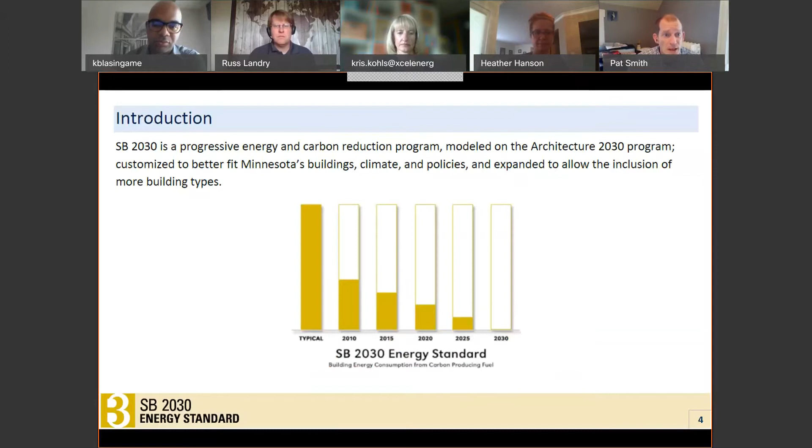And this program fits within a network of related programs that we have in the B3 guidelines program. On the next slide, you can see where this fits. We've got B3 guidelines coming alongside SB 2030 and going through the design and construction phases, and then a suite of programs that are coming in also in the operations phase that include benchmarking, which picks up energy and water consumption data for projects that are up and running, and a couple of other elements of our program.

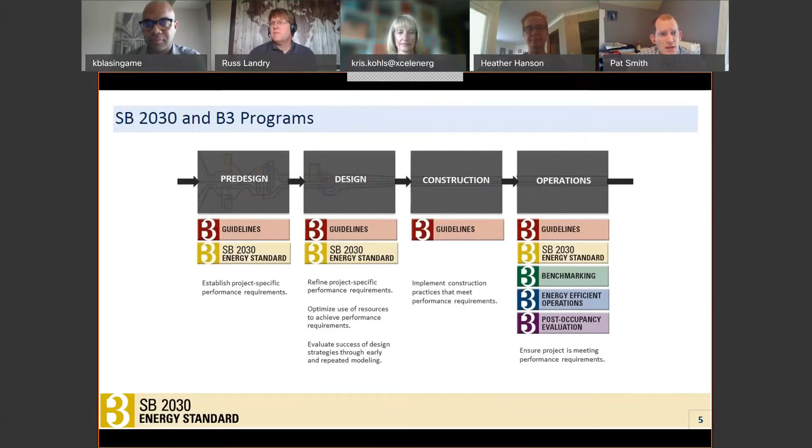So to get this baseline right, we need some information about what the building's program is in order to capture the characteristics of that building. What characteristics of that building impact the energy use? Because we can't set the same target for a warehouse that we would set for a research laboratory. We want to be very detailed about how we're doing this target setting exercise. So this is things like ventilation need, process loads in a project. If your project has a more intensive schedule, that all comes into play when setting your energy target for a building.

So this develops a very customized benchmark for projects, so you will know you'll be treating them according to what their program needs are. And we need this kind of fidelity because there's some variation even within building types between what the different loads are going to be. We pick up this definition, this building characterization, in terms of what are called space asset areas, and those are large programmatic building blocks of the project.

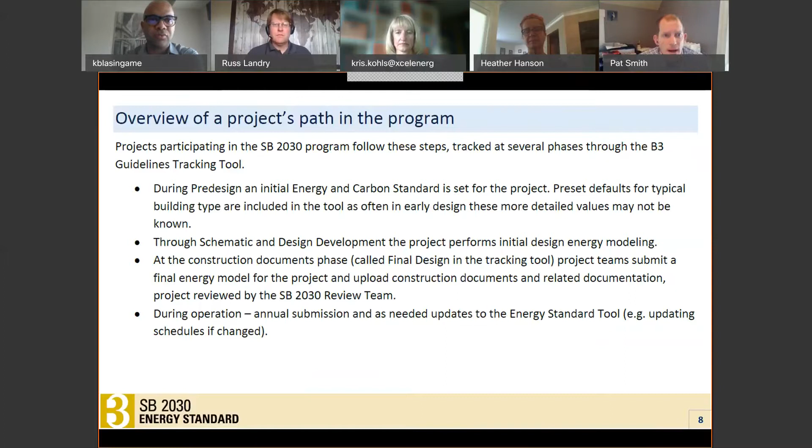Looking at the renewable energy options that are available for projects. So 80% better is a significant reduction from that 2003 baseline. It does represent a step above current code, and in some instances represents a step above what can be achieved with what we consider to be cost-effective measures. So projects that can show that they are exhausting the cost-effective measures available to them can look at other options for hitting their SB 2030 target.

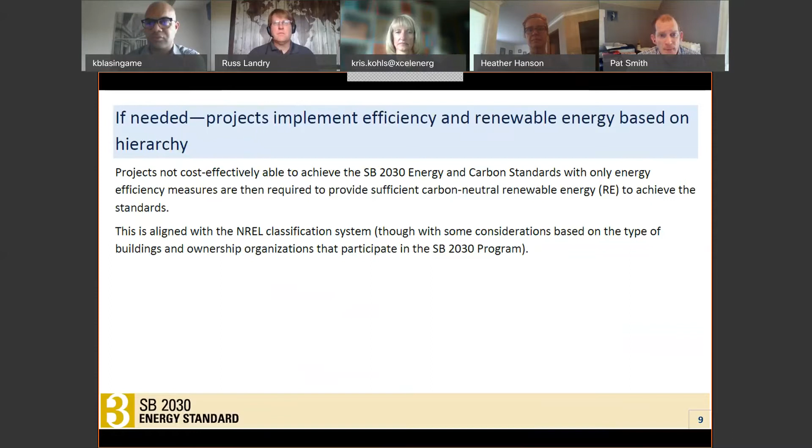But I'll mention that projects need to look at cost-effective measures both on the efficiency side and on the renewable energy side before looking at offsite options. They'll do this evaluation based on a hierarchy of renewable energy generation, and so this can be done in the broader portfolio, which comes into play for state agencies that may have other areas in their portfolio that present a cost-effective development option.

So we're looking at the first three options under this hierarchy as being equivalent. So we've got efficiency measures, renewable energy sources that are being developed on site, and renewable energy sources that are being developed as part of a larger campus, which we're expecting to see most often occurring on university campuses that fall under our program. So those three options of the hierarchy need to be exhausted before moving to other options, and we do that based on a cost effectiveness test.

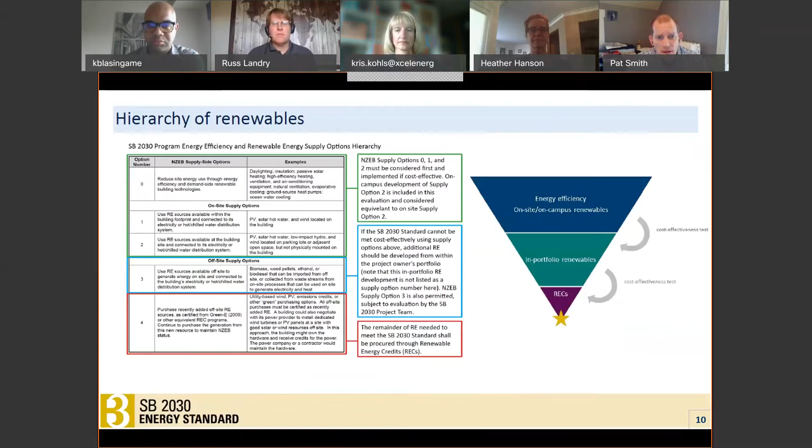And so one other note for program updates as part of this move to 2020, this was one element that we put some development work towards, was developing this hierarchy of renewable approach and different options to make available for project teams to be able to hit these targets. We also looked at what our definition of cost effectiveness was. So our work from the state is required to consider cost effectiveness, and for that consideration to be evaluated in the same way that the utilities consider cost effectiveness when developing their incentive programs.

The type of evaluation that's done for utility program development is more detailed than you'd expect a one-off project team to pursue. And so we needed to develop a way to proxy that cost effectiveness in a way that was understandable for design teams. And what we landed on was looking at a group of around 115 buildings and looking at what measures based on a simple payback could be considered to be cost effective and could be considered to pass, particularly the societal test when looking at effective use of resources. And so that initial study by CEE landed on a payback period of 15 years or less could be considered to be cost effective under this logic. That was done in 2009. And so that was the test that we had in operation for the first roughly 10 years of the program.

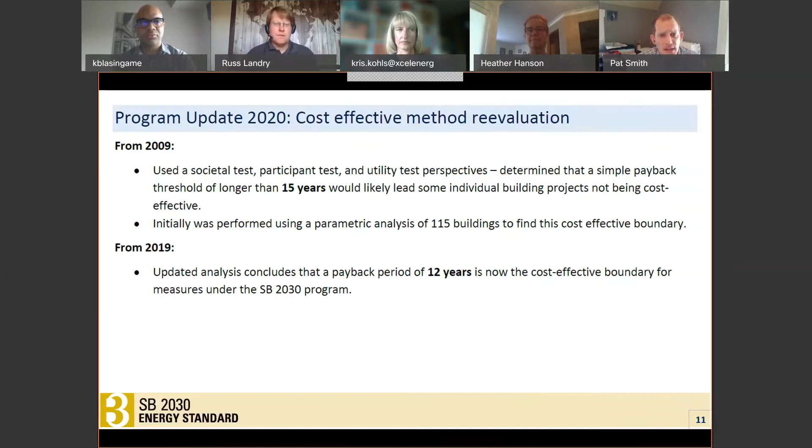Additional program update is to hold renovations to the same standard as new construction. When we moved, we looked a lot at how far the code had gotten. It had surpassed where we were with SB 2030, so we were seeing some opportunities unmet. And looking through the database of projects that had previously gone through the program, we were seeing many of them were making it much of the way, sometimes all of the way, to the 2030 standard.

And so with this additional ability to pick up offsite options, we moved the program to be able to pick that level of performance up for renovation projects as well. But I'll note here specifically, if a renovation project is looking to use that hierarchy of supply options to meet its standard, we are sensitive to considerations around durability and other issues that come up, particularly around historic masonry projects, where there's a limit to the amount of increased assembly performance that you can achieve because of these durability issues.

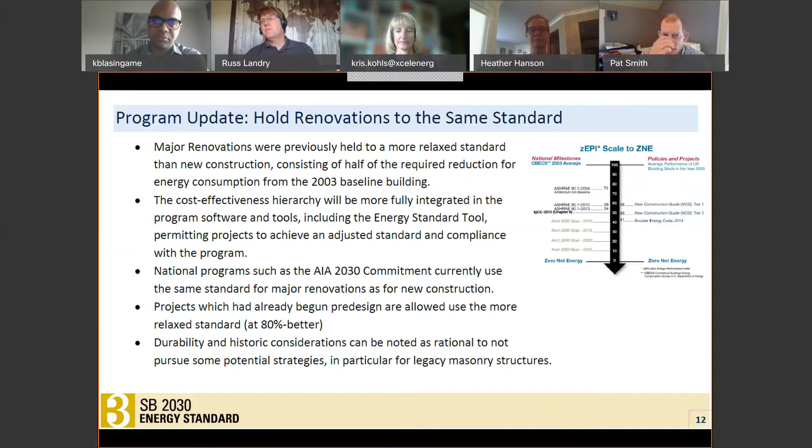And as a final note, I'll talk about a few alternative paths we have in the program. We have a small buildings path where we're still using the same overall structure, where projects look to on-site opportunities before moving off-site, but then allowing this to be done with a prescriptive approach rather than going through a process of iterative energy modeling. We also have an approach for partial mechanical upgrades if only a limited amount of mechanicals are being modified.

We have a wastewater treatment process, which looks a bit different because there are different opportunities in that sector and a different level of energy modeling that's typically performed. And then there's something that was sunsetted in 2020, and that's the cost-effective adjusted standard. So this was a process that has been now developed into setting this on-site target before stepping forward to off-site options. And so projects that started schematic design prior to 2020, a few of them are still working through this process. But from 2020 on, that's moved into setting this on-site target.

Great. Thanks so much, Pat, for that detailed review. Moving on to Russ, how do you approach your review of projects with the recent SB 2030 changes? Are there design aspects that you're focusing more on now?

Thanks. While the review process for the final design hasn't changed much, I'd like to say that it's more important than ever for project teams to make sure that they early on set an accurate SB 2030 energy standard, and also early on get a good indication of their early design energy performance to make sure that they have realistic expectations in terms of where they stand in comparison to the standard.

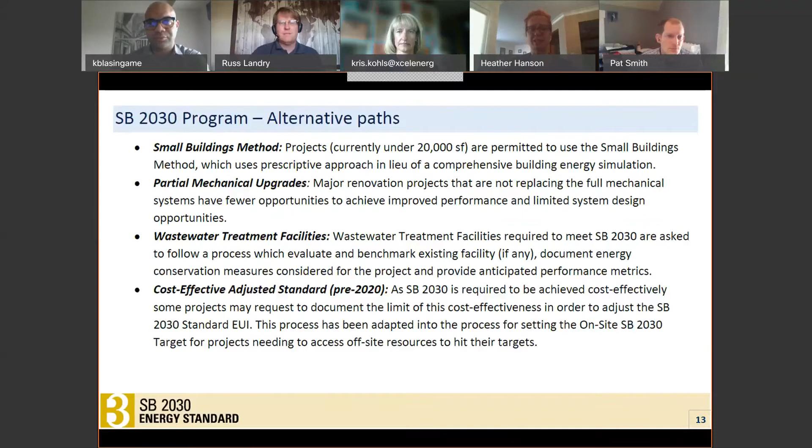that end-to-end to help spot any potential issues in terms of consistency between how the standard is set and how the modeling is being done, and to try to help avoid any surprises later on, and kind of catch things early on and avoid issues as you go through the process later. Great, thanks, Russ. Really good advice and good guidance to the teams.

Keon, as a project manager and architect for Marshall Avenue Flats, could you tell us about the project and how it became involved in the SB 2030 program? Absolutely. Thanks, Heather. The Marshall Avenue Flats is a 6-story, 97-unit multifamily affordable housing project located at the intersection of Marshall Avenue and Fry Street in St. Paul's Union Park neighborhood. This is a rapidly developing area of the city that's not so affordable, but has access to a lot of different amenities. So we saw it fit to look at affordable housing at this location to increase the housing stock within this community.

Affordable housing projects seek funding from various sources like LIHTC funding, low-income housing tax credits, from the city of St. Paul. St. Paul requires compliance with the city's St. Paul Sustainable Building Policy, which adopts the Minnesota Sustainable Building SB 2030 energy standards. So we received more than the $200,000 of funding that we were just talking about with Pat. So we were required to go through the process on this project.

Great, thanks, Keon. And Pat, is the Marshall Avenue Flats project typical? What other common project types or motivations lead to enrollment in the program? So SB 2030 is required for projects funded, such as this one, by the city of St. Paul. So we're seeing some similar projects working through the program. Some come in from scattered around St. Paul. We're seeing some come in from the Ford Site development.

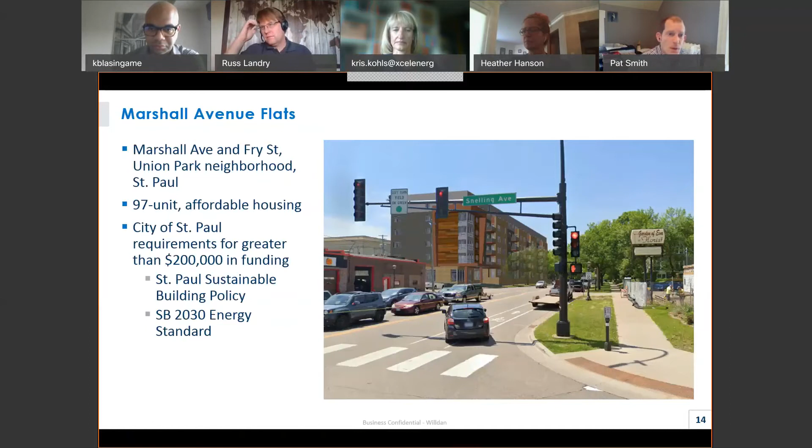So one of our challenges, I'd say, one of our goals in the program has been to adopt and land this concept across a lot of different building types and across a lot of different opportunities, which do vary between our work with the state and our work, in this case, with the private developers. Great, thanks, Pat. And Kris, as the manager of Xcel Energy's Design Assistance Program, can you talk about how energy efficiency programs can assist projects in meeting the SB 2030 energy standards?

Sure, thanks, Heather. Utility energy efficiency programs are great resources for projects that are enrolled in the SB 2030 program, often providing services or incentives for installing energy efficient equipment. With EDA, we provide free energy modeling and consulting to identify and prioritize the cost-effective energy efficiency options. And rebates are available to offset the upfront cost of more efficient systems, driving down your initial investment and also allowing you to go beyond your initial plans.

Energy models provide opportunities to reach new heights for energy efficiency and renewable penetration. They compare how combinations of building systems and components perform and allow you to decide on the best combination based on things such as project cost effectiveness, savings, initial expenditure, the incentives, a payback, or the energy use per square foot. And it really enables you to maximize your energy efficiency strategies at the lowest cost.

Thanks, Kris. Thanks, everyone. So let's talk next about how a project team can best prepare. Pat, what are some of the key tips you would like to pass on to design teams for beginning the SB 2030 process and preparing to navigate the program?

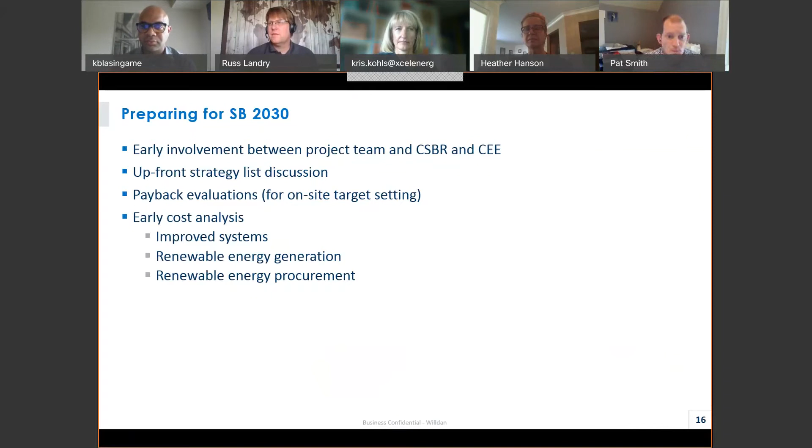Okay, thanks, Pat. And Russ, can you add insight from the perspective of a reviewer? What do you think would be most helpful for a project team to know up front?

Russ, you may be muted.

And some of the key areas there that we're looking for consistency is the programming, even things like square footage. We sometimes see inconsistencies in that, the space types, and also some of the assumptions for some of the key power energy indicators: the equipment power densities, kind of the plug loads in the space, what's the fresh outdoor air flows that the systems are designed for, and the operating schedules, especially the schedules in terms of the lighting and the equipment plug loads. Those can have a big impact on the modeled energy use.

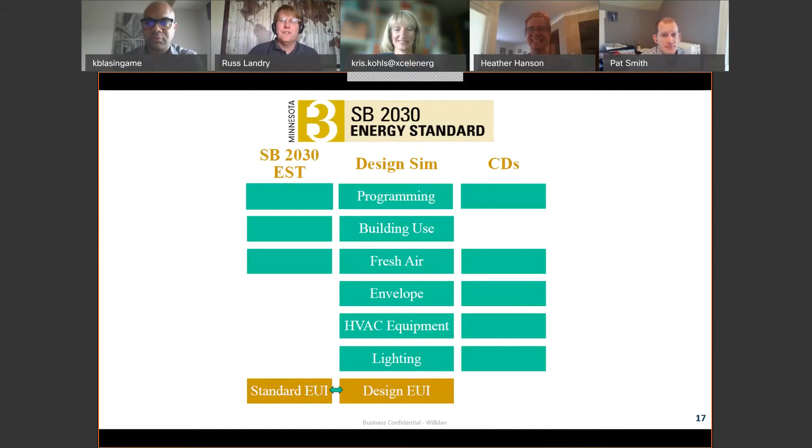Thanks, Russ. And Keon, did you feel your team was prepared? Were there any challenges in getting started, and what was the most helpful?

Thanks, Heather. Absolutely. I think one of our biggest challenges getting started was making sure that we understood how this new 80% EUI reduction target was going to impact our building systems, envelope, more specifically related to the MEP systems. It's a tall order to build to that sort of efficiency, if efficiency was your target alone.

So I think one thing that helped us getting started was just trying to gather as much information as we could. We had a lack of information. What we knew was limited, and we knew that, for example, some of those paths to compliance or alternative paths to compliance were no longer available. That 15-year payback may have changed a little bit.

I think when we had that kind of aha moment is when we engaged in the process with folks like Pat and all you guys, and we started to understand a little bit more that hierarchy of renewables chart, and essentially how that alternative path to compliance was kind of baked into the process overall now.

So we moved into it as we began to understand that and get more comfortable with that by looking at a number of different systems and engaging in the process a little bit more to look at those three sort of buckets, if you will, with on-site efficiencies to maximize energy efficiencies to meet that new payback period of 12 years. So looking at appliances, domestic hot water, envelopes and insulation, HVAC systems, lighting, and all that to really maximize those efficiencies as much as possible, and sell that to the owner too, as part of the process, because I know owners are always kind of keeping an eye on that bottom line too. So we want to be good stewards of their funds.

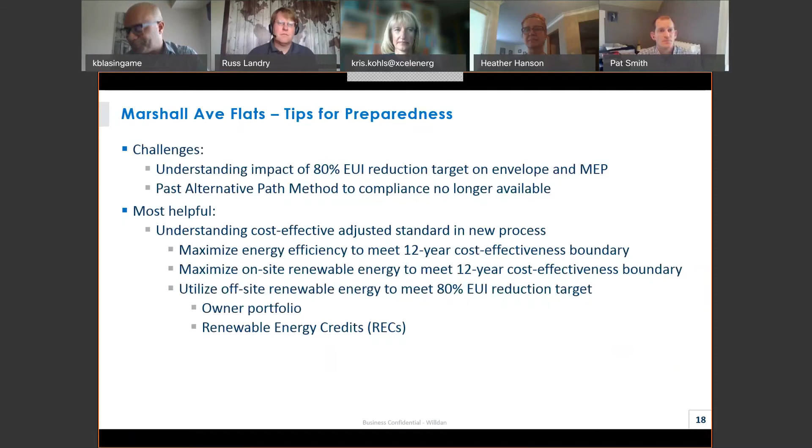Thanks, Keon. And Kris, how can energy efficiency programs be best leveraged in this early stage in the SB 2030 process? Sure. Actually, the EDA's program enhanced track was specifically designed to support projects that were striving for SB 2030 or LEED or any other green certifications. And it evaluates more complex energy saving approaches just beyond the traditional methods.

The value it brings in the early stages of the project include a review of the energy goals, as well as offering a series of in-depth studies all designed to maximize the efficiency of your project. And those studies include building massing to assess alternative massing and orientation options in order to maximize daylighting opportunities, building daylighting to compare alternate window size and placement options for daylight harvesting and sun shading, and then an HVAC analysis to evaluate different systems and zoning options.

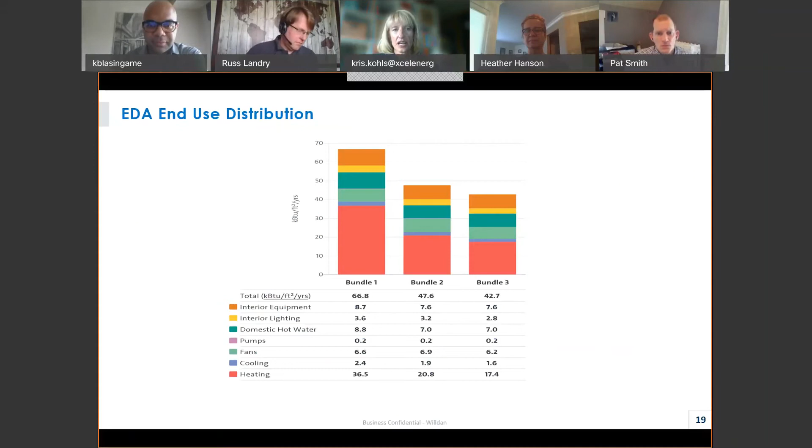So as you go through the EDA process, an energy model is created, which enables you to see the breakdown of the energy use in the building. And then it provides you the opportunity to target the areas that have the most potential for savings. As in this example, while there's no ideal system for every project, an HVAC system is typically the one to offer the greatest opportunity for energy efficiency. And then along the way, along with the design team, the energy model is refined in real time. And this process helps identify the bundle of energy savings measures that will maximize the value of your investment.

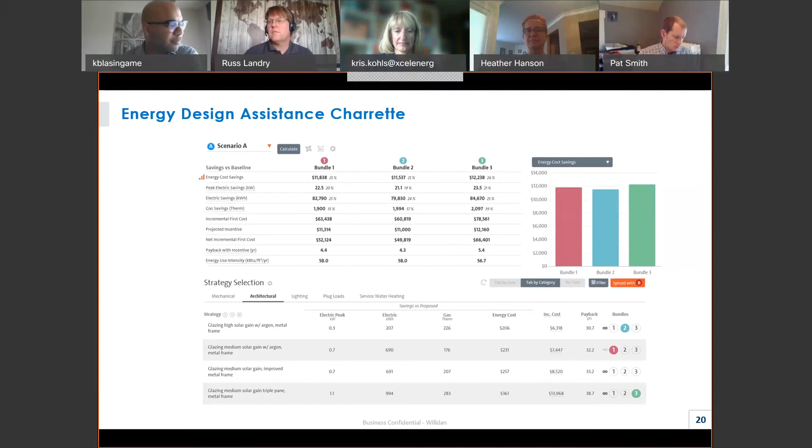Thanks, Kris, and thanks, everyone. So let's talk next about some common hurdles at the design phase submission and some tips for best practices. So Russ, let's start with you. What is most commonly missed in submissions, and what tips can you give to help teams ensure that they're covering all of their bases the first time?

Russ, you may be muted.

I'm going to go back to the same CCM, plus I'm going to add two more C's. Areas where we see issues in final design submissions are consistency between the energy standard tool inputs and the design simulations, and consistency between the as-designed simulations and the actual design itself. Those are, again, real critical things.

And also metering, that there's a good metering plan, and especially when there's sub-meters involved, that metering plan needs to include detailed instructions and indications of how data is going to be captured from that sub-meter, and if there's calculations, if some sub-meters have to be added or subtracted from each other, that there's clear details so that two to three years down the road, when the project has energy data and needs to see how it compares against the energy standard, they know exactly what to do with that metered data.

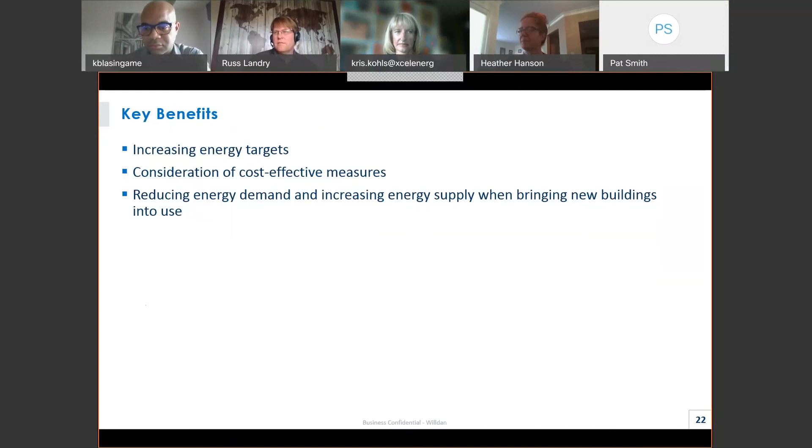Thanks, Pat. And Kris, how about from the perspective of a utility-sponsored efficiency program? Sure. As the community strives to build more sustainable buildings with a lower carbon footprint, the SB 2030 program delivers the framework to achieve those goals. And as such, the EDA program uses SB 2030 as a potential baseline for all projects, not just those pursuing the SB 2030 program, as we find it's a valuable benchmark to compare results and give participants a reference point to target, at least something to strive for.

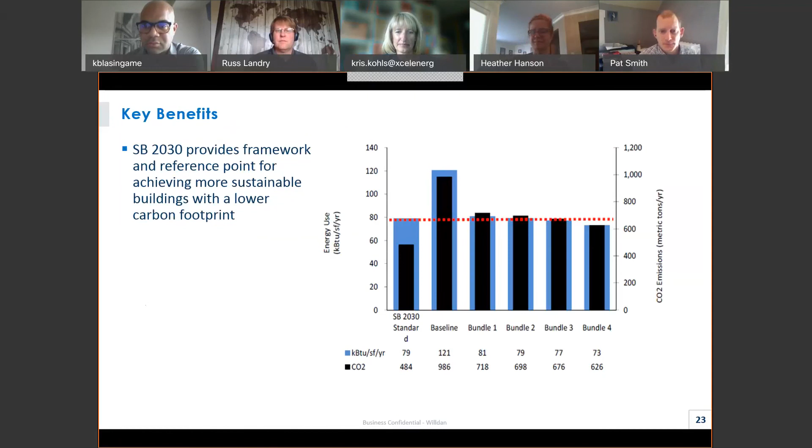So in each of the projects, we provide a chart similar to this, showing them how their bundles match up to what the SB 2030 requirements would be. And projects participating in SB 2030 also find this comparison very valuable because it clearly documents what the goals are and helps ensure that the bundle of measures they choose will meet the goal. Thanks, Kris.

And Keon, from your perspective as the architect, has participation in the SB 2030 program helped to push the design for Marshall Avenue Flats to greater levels of energy efficiency? And if yes, how? Yeah, absolutely. I think certainly on this project, it has helped to push the limits. I think oftentimes design constraints end up being opportunities to overcome challenges that we all need to face as a society. From the perspective of Architecture 2030, we all know what we're facing. And I think that this project was able to actually turn these goals into a benefit for the developer ultimately.

So I think it's great when we are able to look at these things and push the designs in a way that allows us to reduce the overall carbon footprint as we march towards that 100% EUI reduction. And I think we're starting to get to a point, particularly as I look out the window and see the haze of smoke in our current environment, where we're really starting to collectively see the benefits of these moves beyond just money and dollars, beyond what we're improving in terms of efficiencies, which at a certain point are going to cap out, and going beyond that and looking at other renewable options. We've just got to do it as the world grows. Folks are going to need places to live, work, and play, and we have to be good stewards of the environment. So, yes.

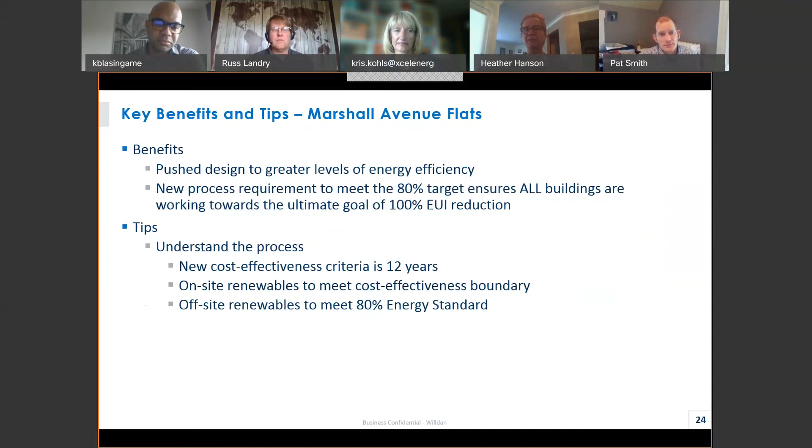Great, thank you. Thank you everyone so much for sharing your experience and providing so much valuable information and insight about the SB 2030 program and how utility and energy efficiency programs can support that, and how teams can navigate this, because we all are working towards a common goal. So this does conclude our panel discussion, and now we will move on to the live streaming audience Q&A.